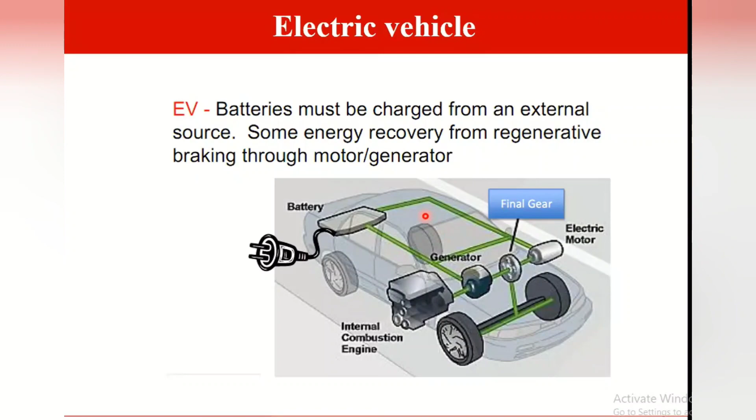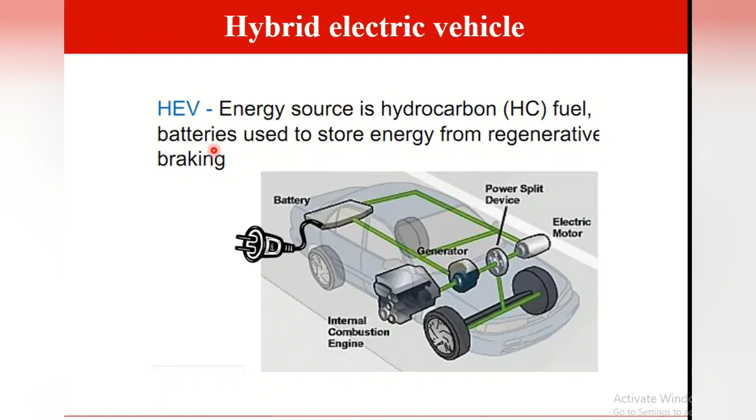Now the hybrid electric vehicle, that is HEV, its energy source is hydrocarbon fuel, and batteries are used to store the energy from regenerative braking. So in this case, you are able to use two different sources as an energy or as a fuel. This is the basic fundamental structure of HEV, which requires some batteries as well as an IC engine to propel the rotating parts.

This is the PHEV, plug-in hybrid electric vehicle. The energy sources are hydrocarbon fuels and grid electricity.

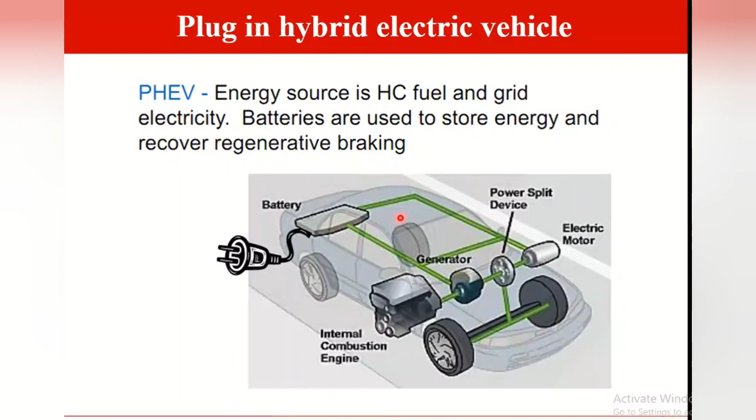Now fuel cell vehicles, that is FCV. The energy source is from the fuel, that is H2 from many sources, and some renewable sources. Batteries are used to store the energy and recover it from regenerative braking. In this type, energy sources hydrogen and oxygen are used, and due to their reaction they produce electricity, which is stored in the batteries, and on this charge this kind of vehicle runs.

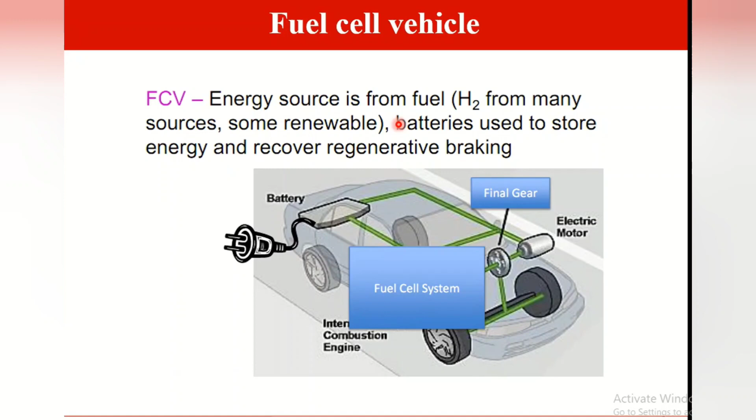Now actually, what is regenerative braking? It is nothing but, while applying the braking or at the time of reducing the speed of the vehicle, it produces some electricity, and this electricity is transferred back to the source or storage unit.

On the screen, you are able to see the conventional vehicle's drivetrain, which includes the engine, clutch, transmission, U joint with a drive shaft, and wheels with differentials.

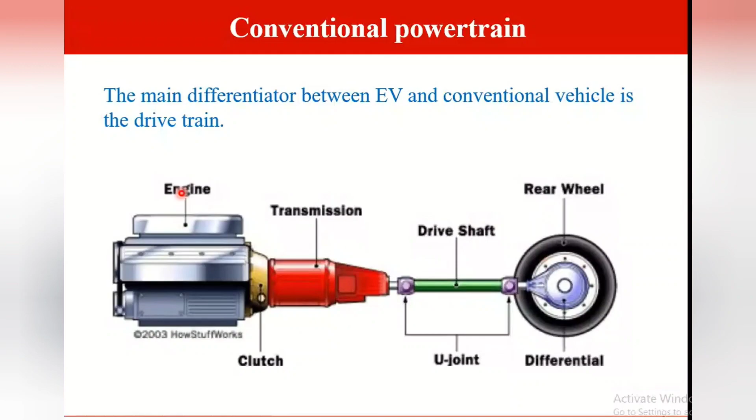Now, this slide is of the IC engine characteristics. So the IC engine, or conventional vehicle, uses gasoline as a source or fuel. The figure shows the characteristic for torque and power with specific fuel consumption, as well as on the right hand side, if the vehicle runs on diesel fuel, it will also show the torque and power characteristics with respect to specific fuel consumption. So using these characteristics, we are able to conclude or calculate information related to torque, power, and fuel consumption.

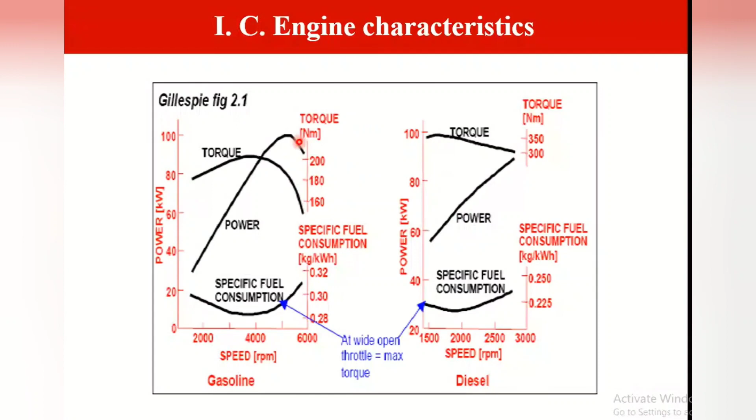From this graph, we are able to understand that in gasoline vehicles, the torque reduces sharply at maximum speed, but in the case of diesel vehicles, torque reduces only slightly with increase in the speed of the vehicle. That is why most heavy duty vehicles work on diesel. Now these are some comments; after seeing the characteristics, you can pause the video and watch it, read it.

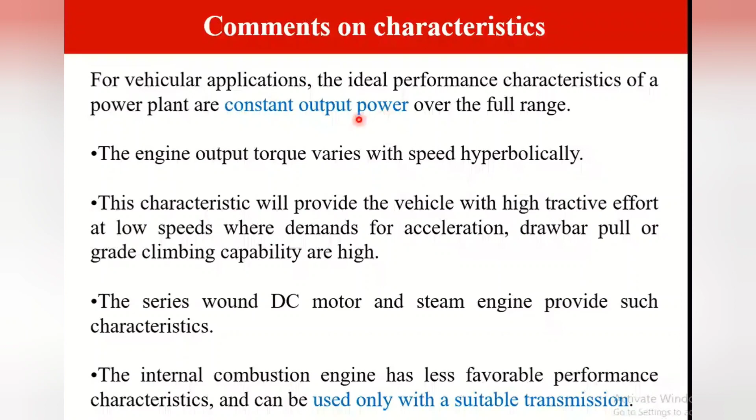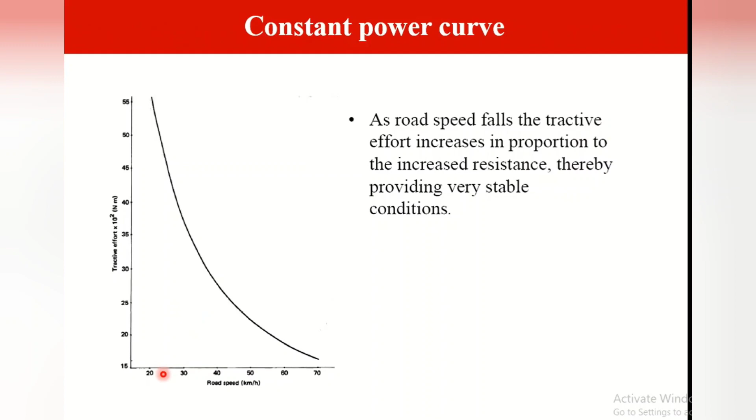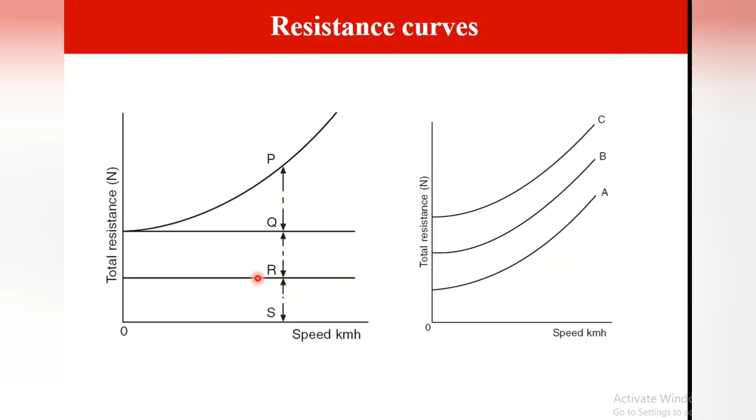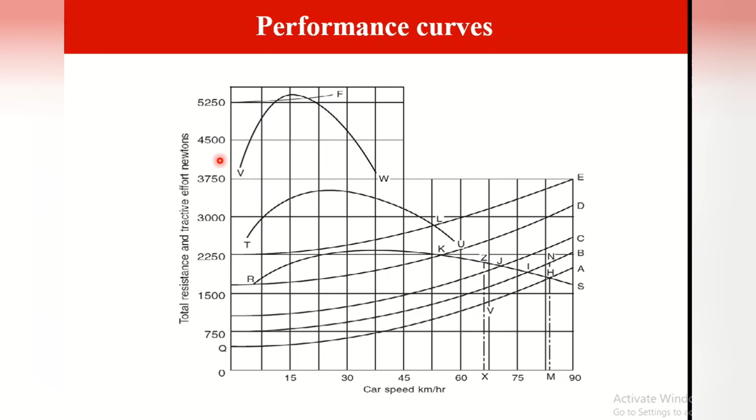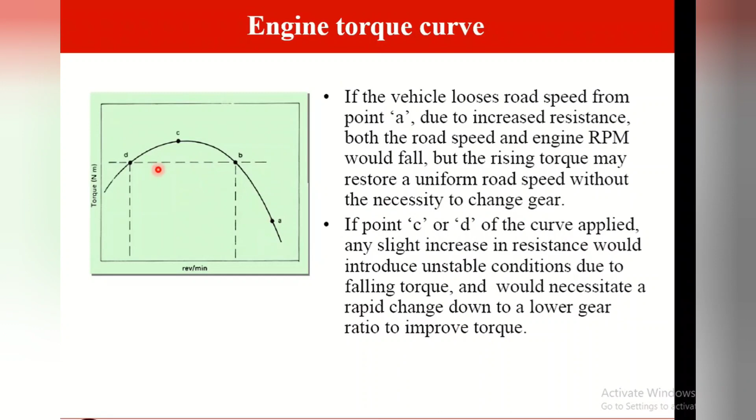Now if the point is C or D of the curve, a slight increase in resistance will introduce an unstable situation, and torque will fall. This necessitates a rapid change down to a lower ratio to improve the torque of the machine.

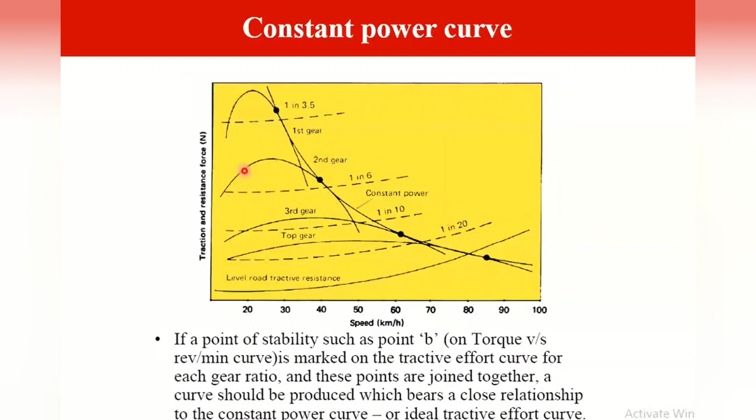Now this is the constant power curve. It represents the constant power output at various situations in terms of speed and tractive effort or tractive power requirement.

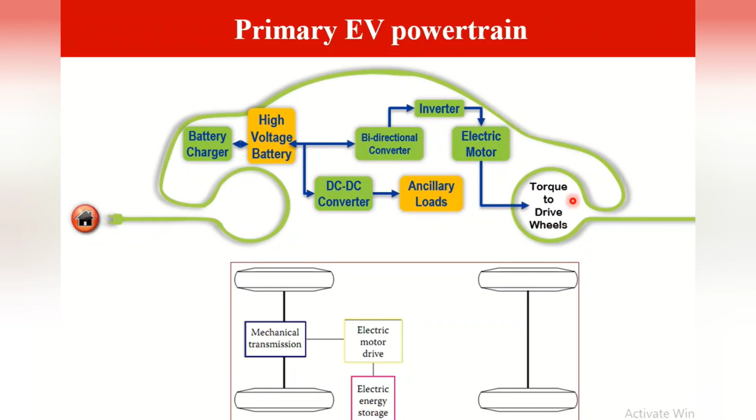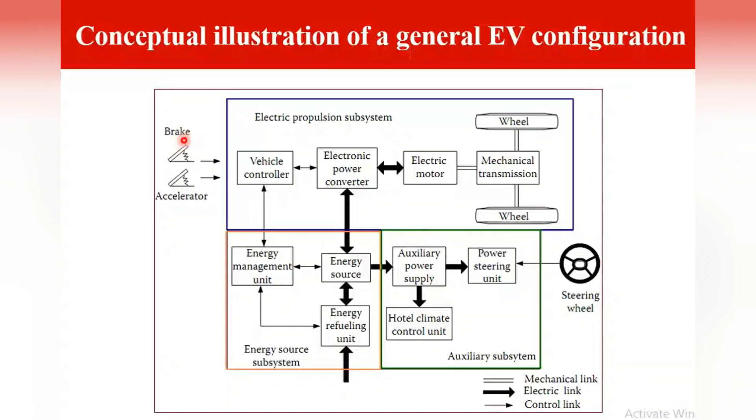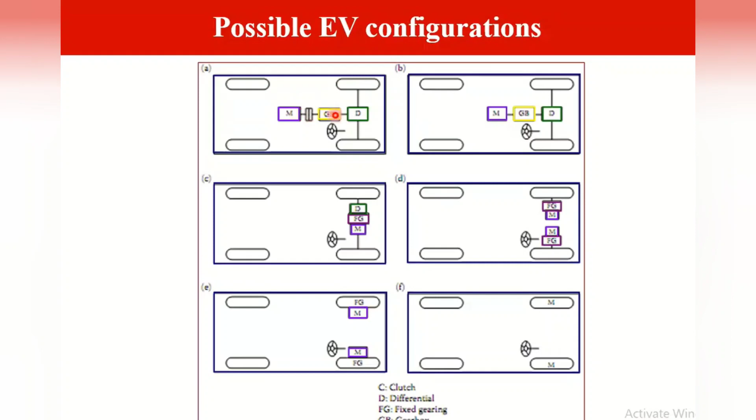This slide shows the possible EV configurations. This is the pure EV vehicle, with the arrangement of clutch, differentials, fixed gearings, and motor systems. You can connect these parts like the machine, fixed gearing, and differentials in various manners, and by the manner of connection, we can construct various configurations.

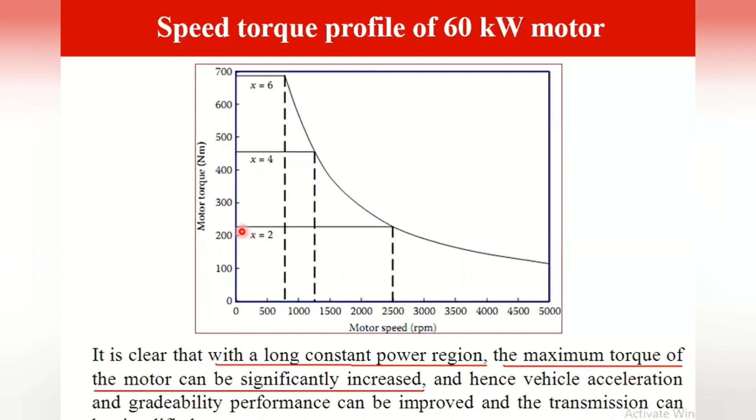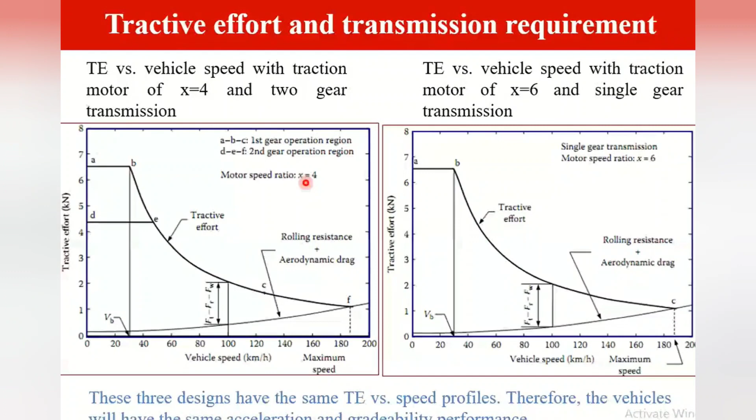Here are some requirements of EV motors. Ruggedness is the first and most important requirement. Second is the high torque to inertia ratio, where inertia means the weight of internal parts. After that, peak torque capability of about 200 to 300 percent of the continuous torque rating.

After that, high power to weight ratio, meaning with less weight of machine, it can produce high power. Then high speed operation and ease of control, meaning we should be able to control the speed of the machine or control the machine easily.

After that, low acoustic noise, low electromagnetic interference, low maintenance, and low cost, as well as extended constant power region of operation. So these are some technical requirements of EV motors.

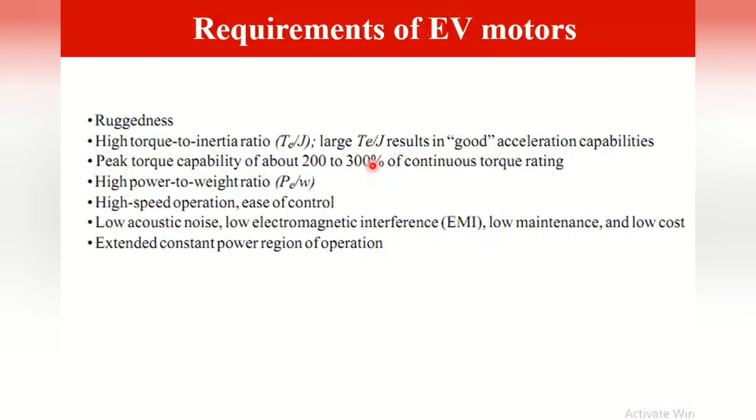These are some motors commonly used for EVs. First is the induction motor, after that synchronous motor, SRM that is the switched reluctance motor, after that permanent magnet DC motor, also known as PMDC or PMAC motors, and our last one is the brushless DC motor.

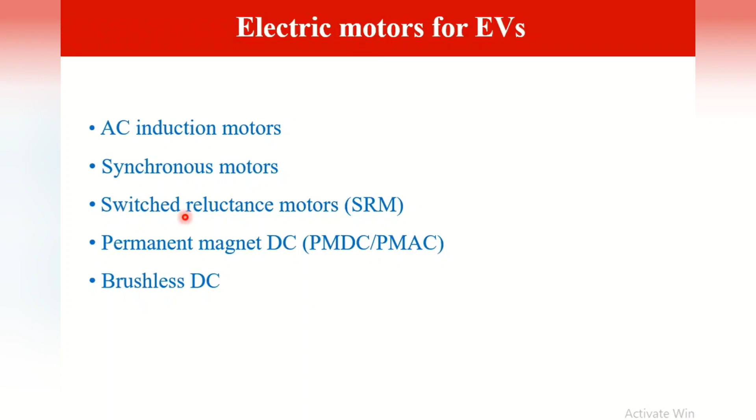Now let us see one by one. For more information, please stop the video and watch the information carefully.

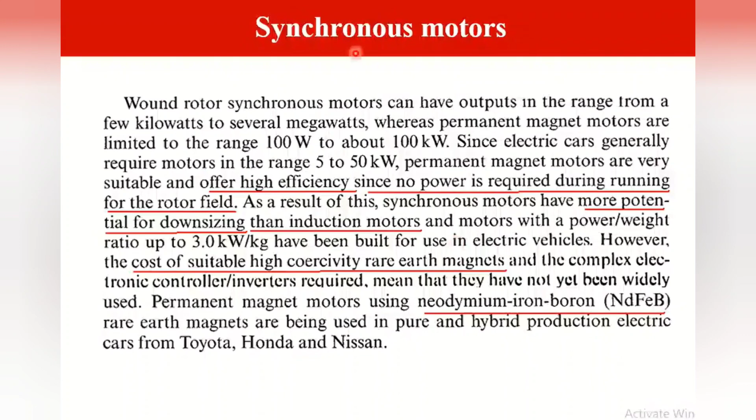While selecting the battery, we have to consider the following points. Now, what is the specific power? That is an indicator of the maximum power that the battery can deliver instantaneously. What is specific energy? The energy capacity per unit weight of the battery. Now, what is the energy density? How much energy per unit volume the battery can store.

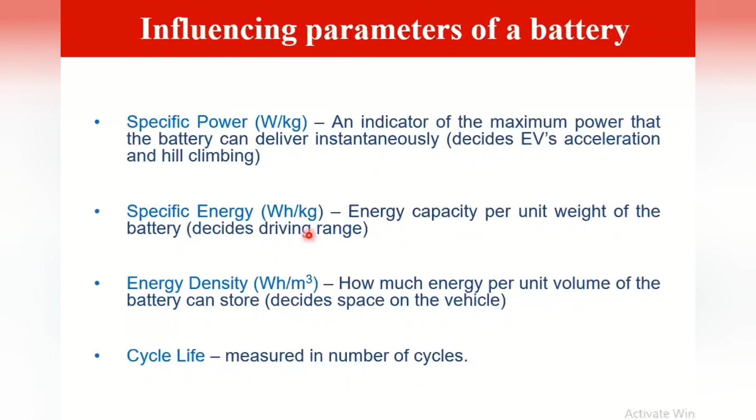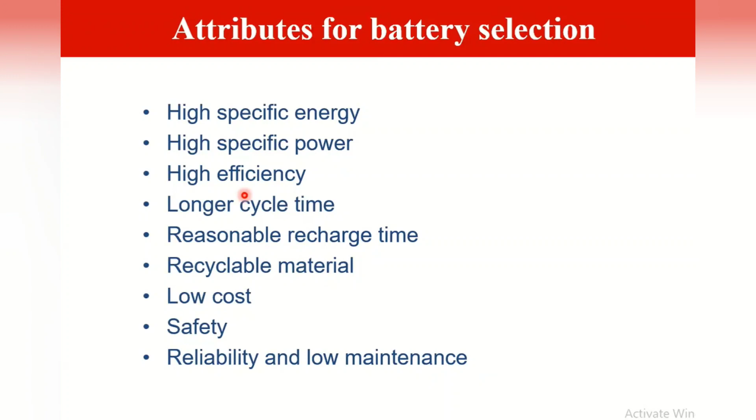And what is the cycle life? The cycle life is measured in number of cycles, meaning how many times it is able to charge and discharge. Similarly, other points are high efficiency, longer cycle time, reasonable recharge time, recyclable material, low cost, safety, reliability, and low maintenance. These are some important points.

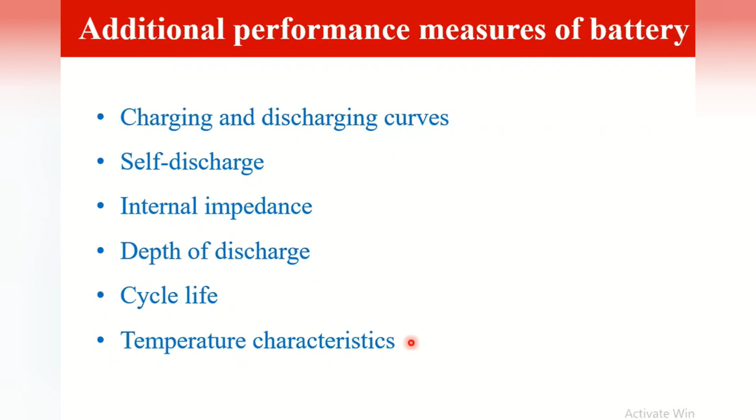So these are some additional and also important performance measures or parameters of the battery. First parameter, charging and discharging curve. Second parameter, self discharge. Third parameter, internal impedance. Fourth parameter, depth of discharge. Fifth parameter, cycle life or life cycle. And last parameter, temperature characteristics. And all these characteristics are controlled, operated and sensed by the SOC, that is the state of charge, and BMS, that is the battery management system.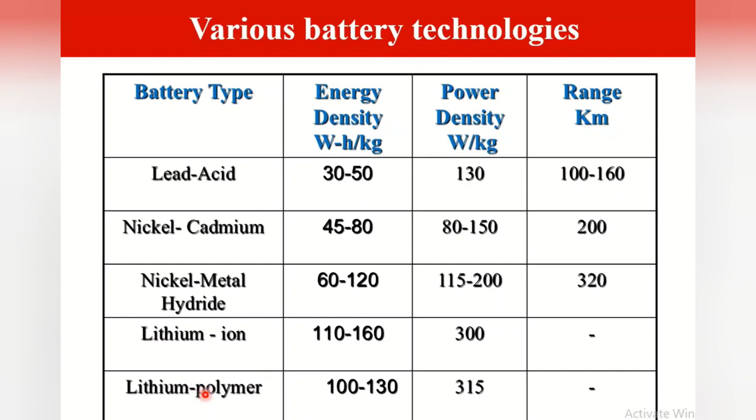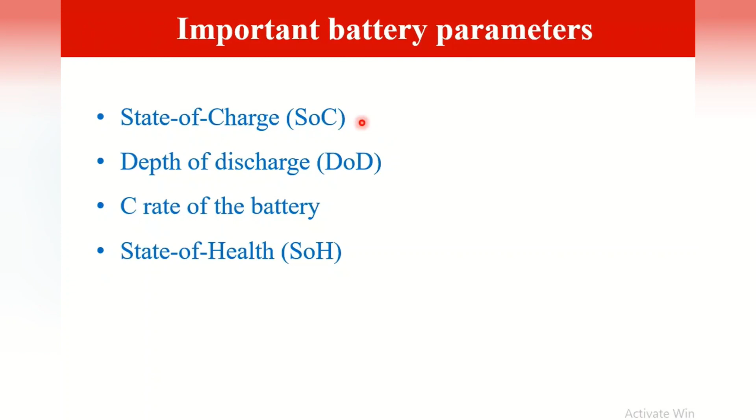Now these are some important battery parameters by which we can detect the capabilities and performance of the battery. So the first one is the state of charge, that is the SOC. Second one, DOD, that is the depth of discharge. Third one, C rate of the battery, that is the charging rate. And the last one is the SOH, that is the state of health. Now to clear the concept, you can read the information on the SOC and DOD.

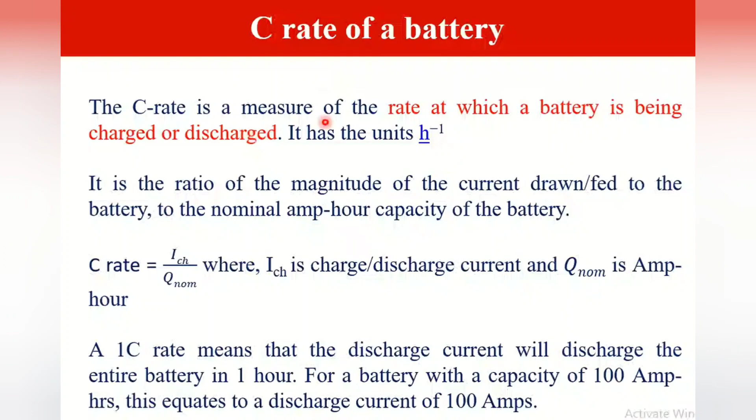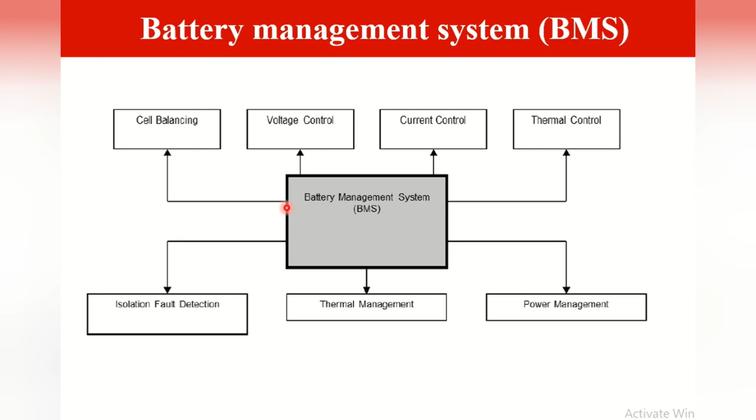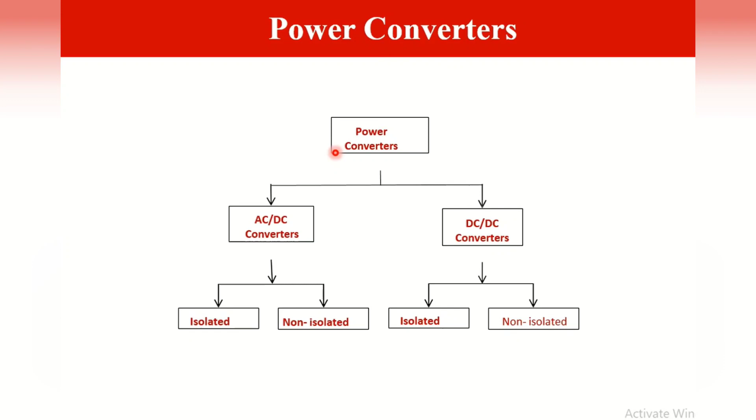These are the types of power converters, which are mainly classified in two types, that is AC-DC converters and DC-DC converters. AC-DC converters are of isolated and non-isolated type, and similarly DC-DC converters are of isolated and non-isolated type. So various types of chargers are there with various voltage ranges, current ratings, and charging loads. Okay, so please read the information on their specifications and details with the various international codes.